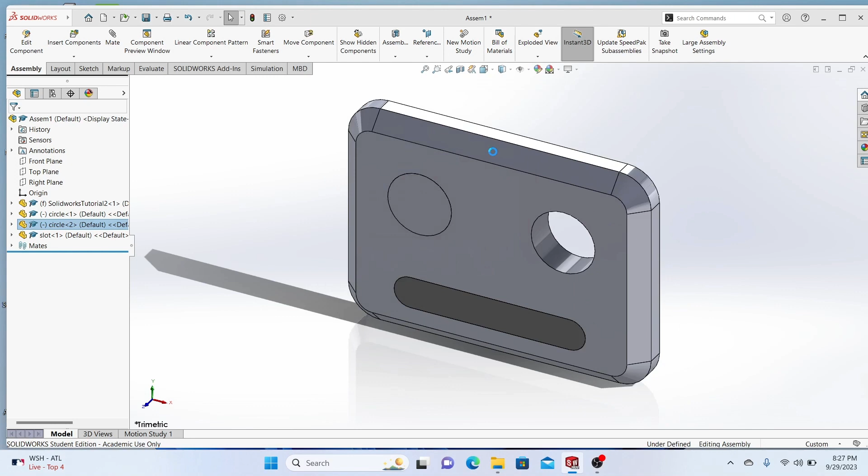So the first thing I'm going to do is actually delete all these parts one by one, so we can start with an empty assembly.

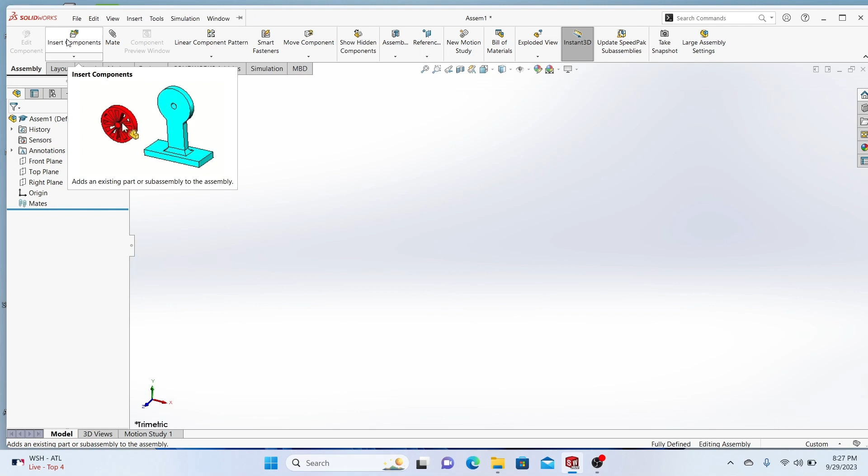So now that we have a blank assembly workspace, the first thing we need to do is insert our components. The first component we're going to add is our base.

The name of the part that we are using as our base is SolidWorks Tutorial 2, but you can name parts anything you want.

Now that the base is inserted, we are going to add the other components that we plan to add. So we need two of the circular parts.

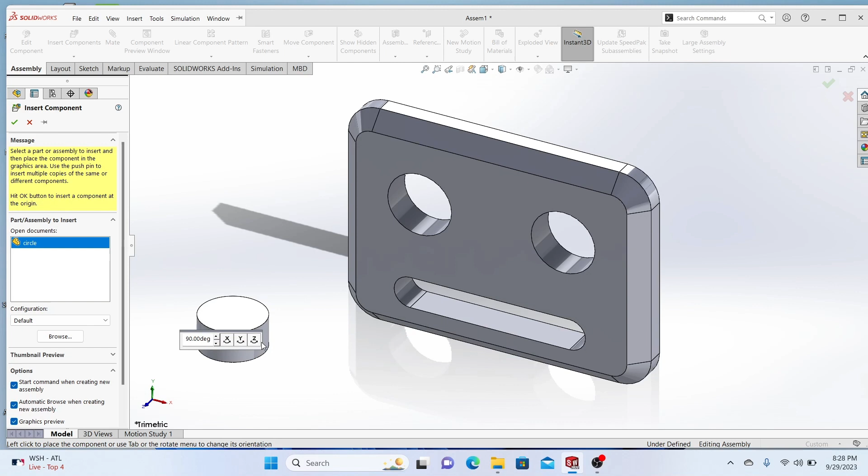As you can see here, when I go to add one of the circular parts, it is not in the right orientation. So I'm going to go down to this menu that just popped up, and I'm going to rotate it by clicking the X rotation, and now it's oriented the way I want. I'm going to click it so it adds to the workspace.

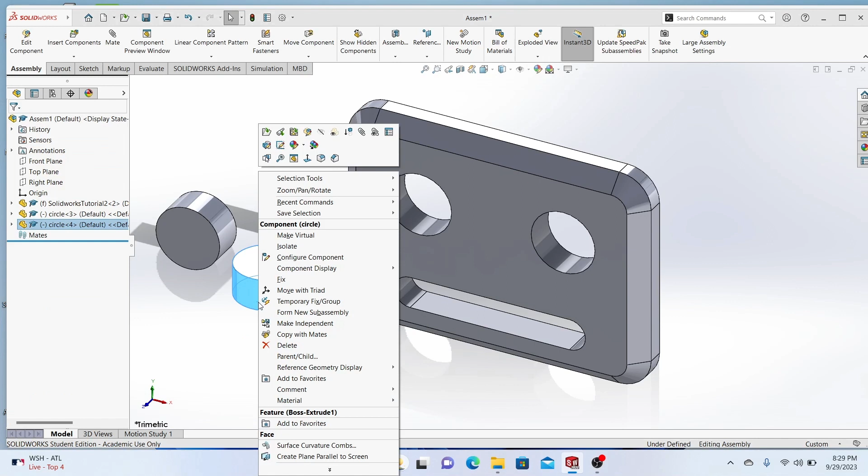And we're going to repeat that and add another circle. This time I did not click it, so we're going to have to click Move with Triad and adjust it.

And then the last component we need is the slot. This one also needs to be flipped, so we will hit that X rotation key again.

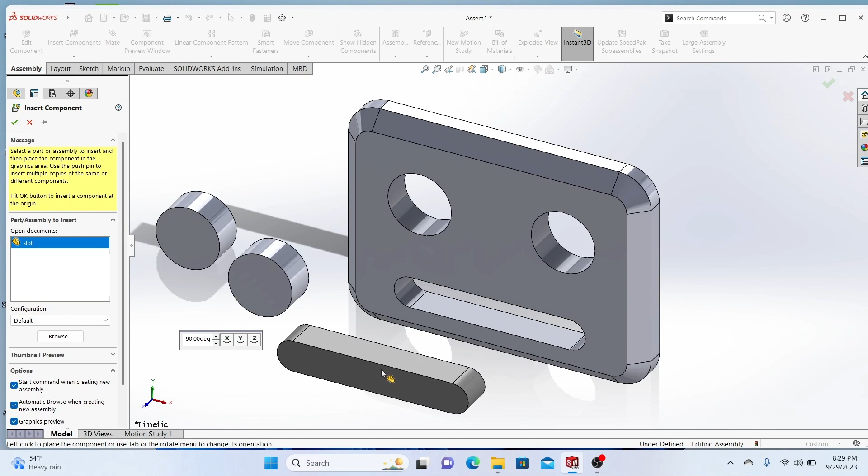Now, in this video, we're going to talk about two types of mating: the concentric mate and the coincident mate. So the first mate is the concentric mate.

To do that, you're going to select two circular surfaces that will ultimately be concentric to each other, which means that, kind of like a screw, one will fit inside of the other. So in this case, the outer surface is going to be this surface right here, and the inner surface that's going to be inside of it is going to be the outer surface of our circular part.

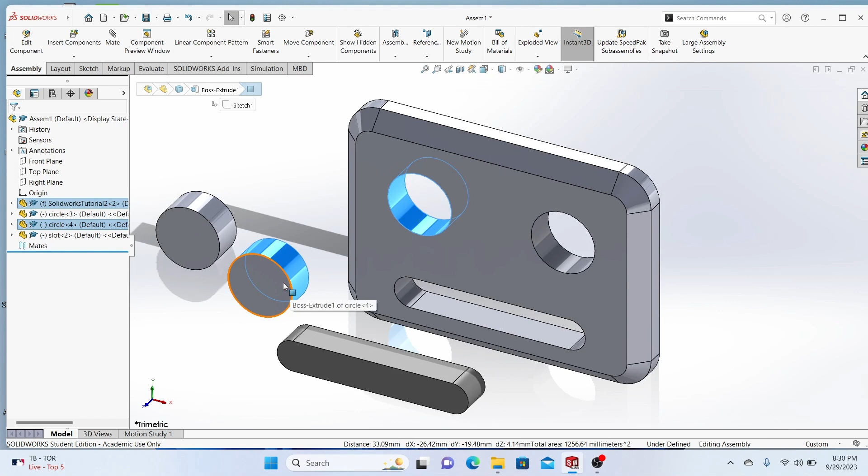When you're ready to mate, you just go up to the mating window and click mate, and as you can see, it brings the part right over and automatically selects concentric as the default option. If you are all set, all you have to do is click the green check for OK. As you see here, the mating window stays open.

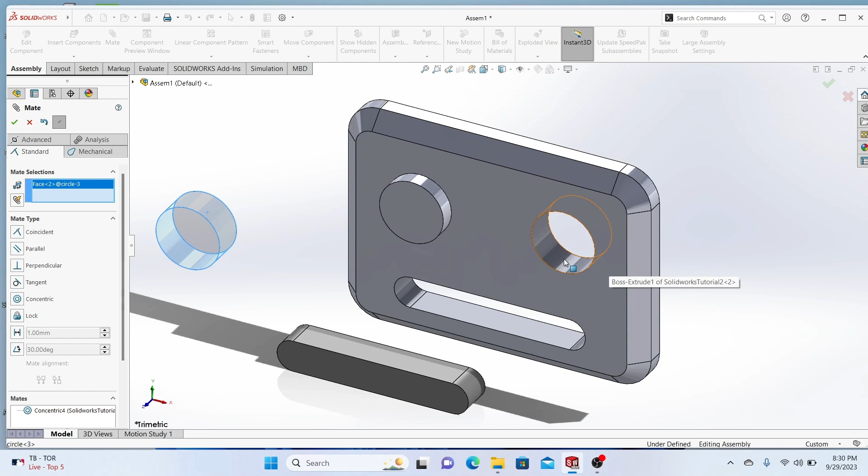So now we're going to do the same concentric mate that we just did over here to this part. And then we're also going to add coincident mates. Coincident mates are mates where you select two edges, and when you mate them, they're essentially going to be stuck together as if you were to put a screw or a nail in to hold it in place.

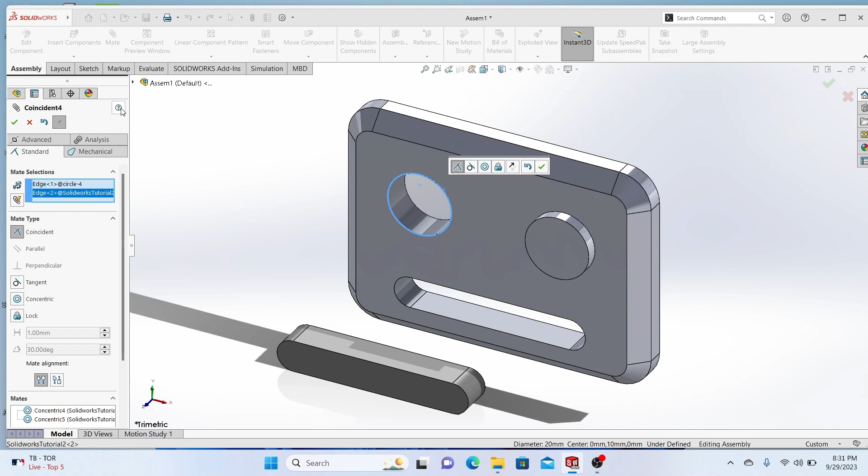So the two edges we're going to use are the top edge of our circular part and the corresponding circular edge on the base. As always, when you're ready to finish, you can just hit the green check, either here or here. And then we're going to repeat.

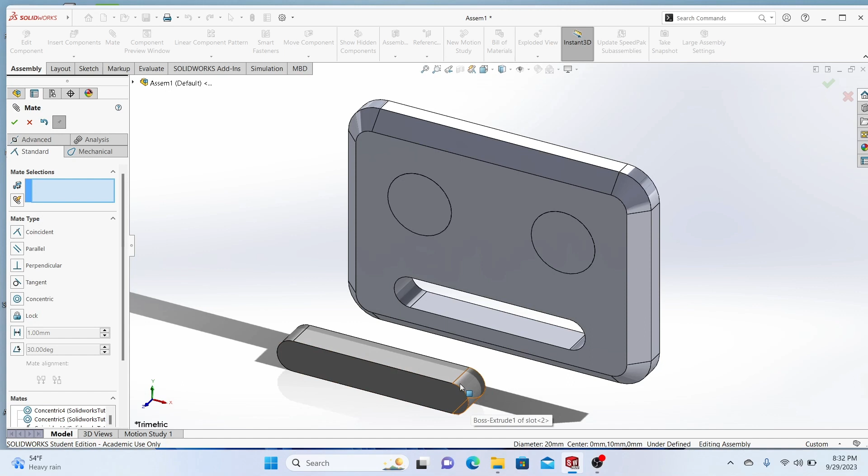The last thing we need to do is mate this slot. We're going to use the same two mates that we used before, but this time we're only going to select part of the slot as our circular surface instead of a complete circle.

So I've selected that surface here, and I'm going to select the corresponding surface over here. It's going to automatically assume that we are doing a concentric mate, which is what we want.

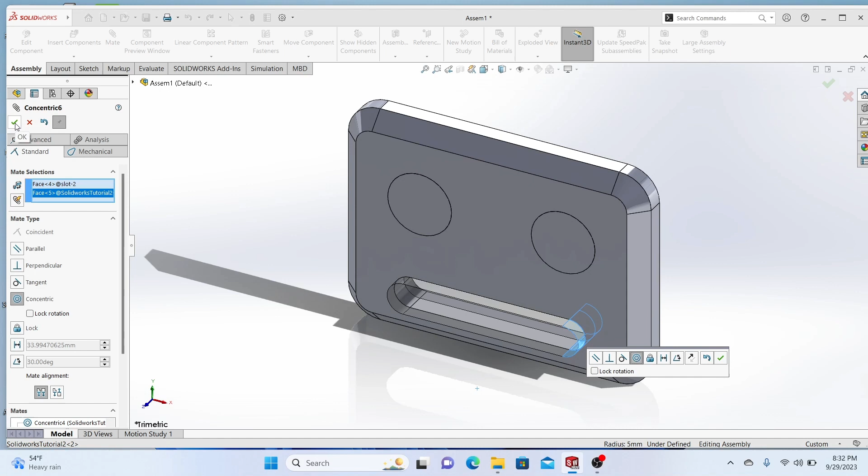I'm going to hit the green check, and then we're going to add a coincident mate by selecting this top edge and the corresponding edge. And we're going to hit the green check, save it.

Now that we are all done with our mates, we can hit the X to close the mating window. And now we are done. In the next video, I'm going to go over some more advanced mating options, such as the parallel mate, the perpendicular mate, and the lock mate.